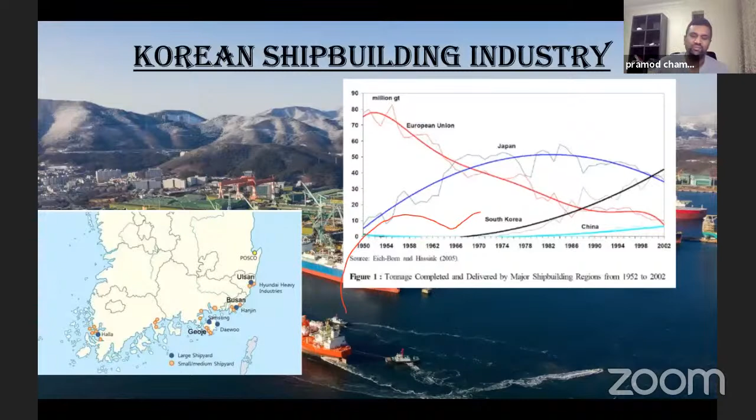Okay, now in Korea, there are 84 shipyards, 84 shipbuilding companies. And of course, the major five are the most important ones. HHI is Hyundai Heavy Industries, the same company that makes Hyundai cars. DSME is Daewoo Shipbuilding and Marine Engineering, the same company which makes our Daewoo Matiz cars. And SHI is Samsung Heavy Industries, the same company which makes the mobile phones. And Hyundai Mipo and Hyundai Samho are part of the Hyundai group. They actually spread around in many areas.

So if you look at the map, you can see Ulsan, where Hyundai Heavy Industries is. And then if you come to this area marked as Halla, this is where they have Mipo and Samho. This was basically Halla shipyard a long time ago, which they acquired, and now it has become Hyundai shipyards. And there are medium shipyards like STX, Daehan, Hanjin, Sungdong, Daesun, etc. And there are so many small shipyards. These small shipyards need not always make the full ship. They can also act as subcontractors for the major, medium and large shipyards.

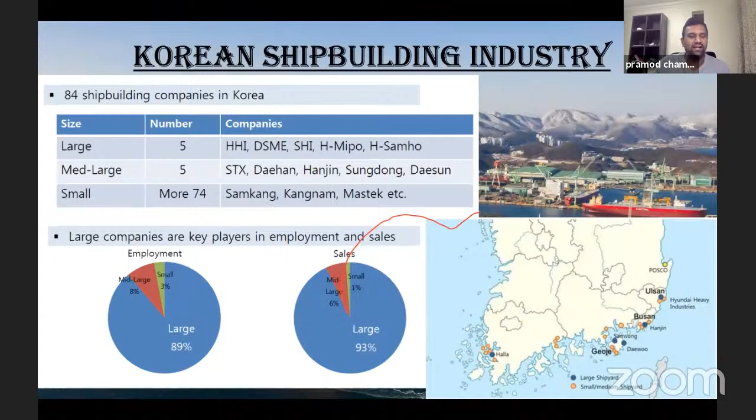So in Korea, one of the major employers is the shipbuilding industry. And if we look at other parts of the world, we always see blue collar and white collar, right? Blue collar are people working in the production area. White collar are people in design and office and things like that. Korea is a country where the blue collar people are paid more than the white collar people. That is also due to their high productivity and skill, which we'll come to later. But just as a fact, even if you're on a production site, you are getting more money than the guy sitting in the office or in design.

Okay, now I have a small time-lapse video. This is a Maersk Line container vessel. Just have a look, and we will talk a little bit about it.

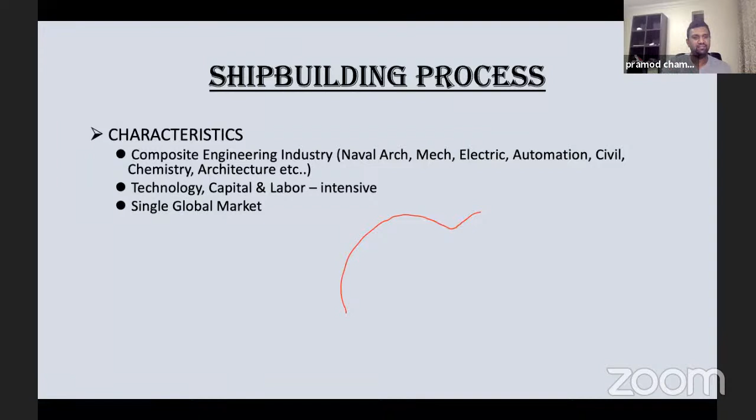And it's a single global market. What does that mean? That means it's not that there is a market for India, a market for Korea, a market for Japan. It does not work like that. It's a global market. Anybody can order a ship anywhere in the world. So you are competing with different countries. It's not a localized market. It's always a global market.

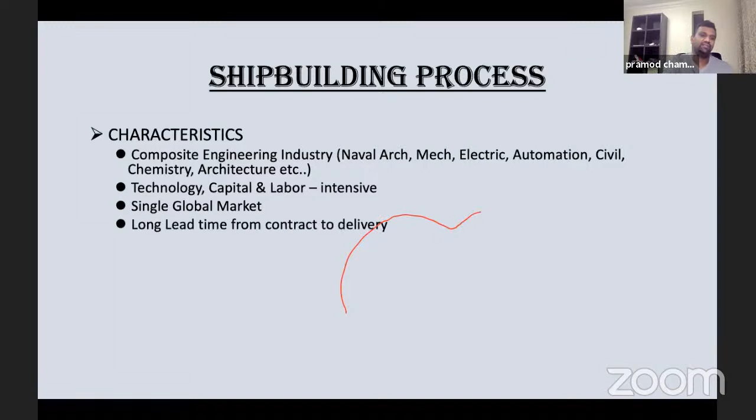And the other thing is the long lead time from contract to delivery. This is very important, because if you want to go and buy something from a shop, say a car, if it is not a new car with a long waiting line, you just go and get the car. You can drive the car back to your home. But in the case of the shipbuilding industry, it does not happen that way.

Why is it important? Because if I see the market now, okay, bulk carriers are booming, so let me go and buy a bulk carrier. Of course, you can buy a bulk carrier on the market as a second-hand vessel. But if you want a new building, there's a long lead time. So by the time the vessel is built, say 2 years, maybe the bulk carrier market has crashed, and the tanker market is up. So this is also a characteristic of this industry.

So the fundamentals you need to understand: capital is very, very expensive, and quality, delivery time, and reasonable price are very important. And it's made to order. Like I said, every vessel is different. Even if it's the same VLCC, unless it's a sister vessel, it's all different.

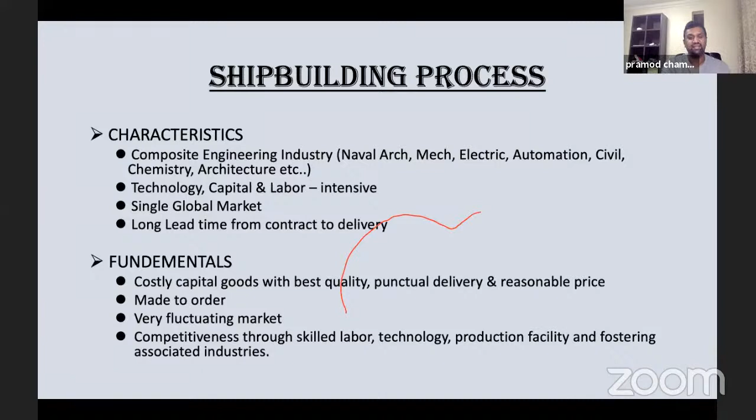And the market is very, very fluctuating. First, the Greeks will smell the market and start ordering, and then others will follow. Then the market gets overcrowded, and for that kind of vessel, the boom will go down. So it's a very fluctuating market, and competitiveness can be acquired through productivity, that is basically skilled labor. And most important is the last one, associated industries.

Many people ask me, why can't you build ships like this in India? You have very good weather compared to here. Here we have snow, very cold and very hot. Why can't you build in India, where the temperature is almost constant? The main problem is we don't have associated industries. We don't have other industries to support the shipyards. So we have to import everything from outside, which again increases the cost for us, and then we lose our competitiveness.

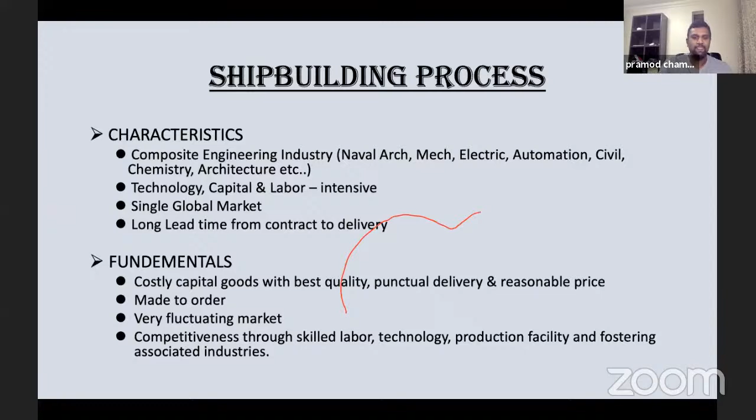Okay, now to understand the whole shipbuilding industry, we will have a look at the upstream and downstream. The upstream and downstream are used in a different way for offshore, so the offshore guys, please pardon me, I'm using your words here. So upstream of the shipbuilding industry could be shipping, energy, fisheries, tourism, defense. And downstream would be all the equipment plants, the paint manufacturer, the electrical equipment, steel, etc.

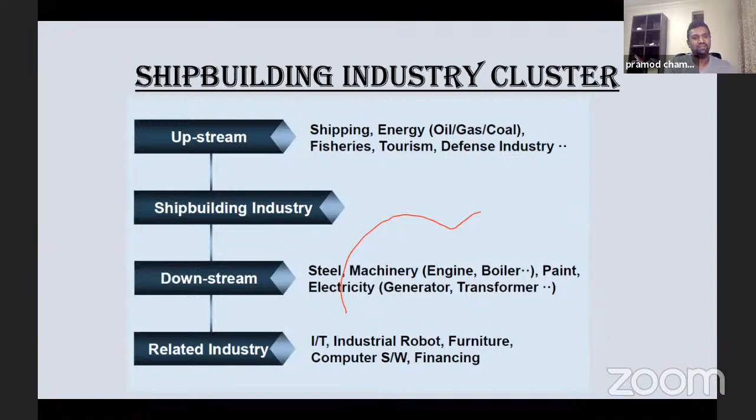And also very important are the related industries: IT, robotics, furniture, computer software, and very, very important is the financing. So this is where the shipbuilding industry is. The shipbuilding industry is very volatile. Any variation in either upstream or downstream can directly affect our industry. So it's like a stock which can be very volatile, like a Bitcoin maybe. The industry can be very, very volatile.

So how does shipbuilding happen from beginning to end? First, we build a contract. Of course, before the contract, there are so many other things which are not relevant here. Before you sign a contract with the shipyard, tenders have been made, and then you make LOIs with shipyards. Then you compare the prices of shipyards, and finally I select one shipyard. Then I make a contract. That is my first step.

After the contract, I have to start the design. Then what? Then it's the procurement. Once the design is finished, I have to order all the equipment required. I have to order all the steel. I have to order everything. Then once everything is in place, we have the production and then delivery. Very simple, right? So what do we do in the contract stage?

The contract stage actually defines R&R, role and responsibility for each party. It will tell you, this is my scope, this is your scope. And the common goal is what? To have a good ship and return on investment. And there is a conflict of interest here. The shipyard wants to build a not so bad ship with less cost. But the owner always wants high quality vessels. The builder wants a high price for the vessels, but the buyer wants higher quality with a lesser price. There is always a conflict of interest in the contract.

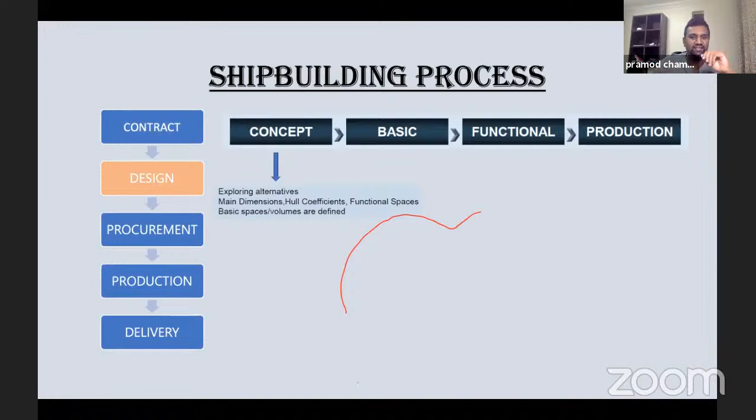In concept design, you are only fixing the main dimensions, hull coefficients, volumes, things like that. Then we move to the basic design. This is where we develop the system. Main propulsion plant, electric plant, everything is decided, and based on that we make the key plans.

We call the key plans lines, midship sections, general arrangement, system drawings, and deck house arrangement. This is prepared. I'm not fully sure, but by the time you pass out from the department, you will be doing concept plus a bit of basic, not 100% of basic, but maybe 80% of basic design as well. But other things you won't be doing during your career; you will get to see them only when you're working with the shipyard.

So once this is developed, then we go to the functional drawing. That is where the systems are finalized. Equipment selection is done here. So while moving from concept design to the functional design, you have time to finalize your maker list. By the time the functional design is finished, your maker list also will be frozen. You cannot change anything more.

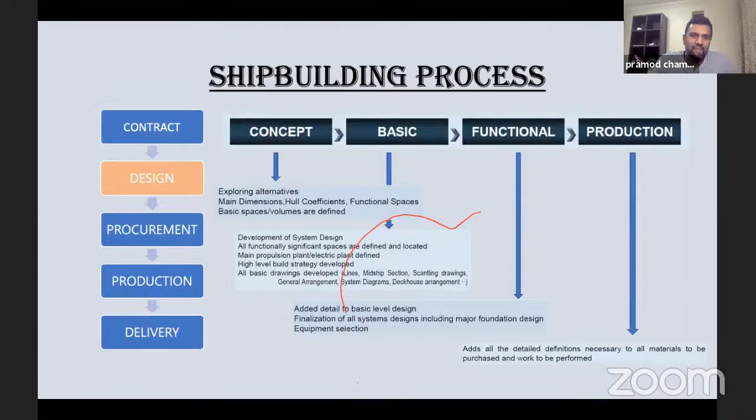So then we finish the design phase. After signing the contract, in general, it will take a year to finish from concept drawing to the production drawings. Now I have put procurement and production together. Why? Because once design is finished, the designer's work is not finished. He has to issue the purchase order specification. Normally, it goes to procurement.

The procurement team uses this POS and then sends it to various makers. Makers will come back: okay, we can do this, we cannot do this, this is the price, and so on. This process also takes a while. It goes up and down, and then the client says, no, this maker is not good. Sometimes clients also have under-the-table dealings with the maker. So this is also where the shipyard can make money. I will give you an example.

You have different paint makers, for example. You have IPK, Jotun, KCC. The shipyard always tries to get the cheapest, satisfying the purchase order specification. Say KCC is the cheapest, but the owner wants IPK. The shipyard is entitled to pass this extra cost to the owner, because the shipyard has the right to choose any maker from the maker list. Suppose I am the shipyard and I have chosen the cheapest one. If the owner wants the higher one, they have to pay the extra.

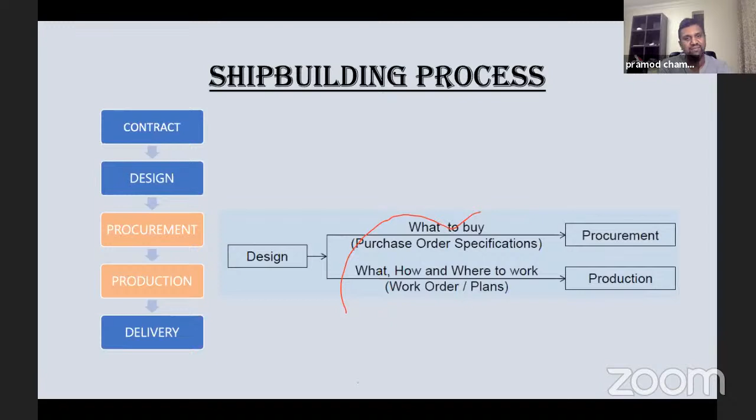They are very good at new building, if the process is from the beginning. But if there is a mistake and you want to repair, they are most of the time at sea, because they are not used to this kind of rework. So in any project, as a project manager, your effort will be to minimize the mistakes in design, because small mistakes in design actually cost a lot for the shipyard.

We'll talk a little bit more about procurement. As I said, it's the selection of equipment or material based on the maker list. You cannot always go for the cheapest. There is always a risk, right? Suppose you go for a Chinese maker, and then you find that there's a long waiting time between when the equipment comes on board and when the vessel is delivered. Most of the warranty starts when the equipment is delivered on board, so then it's the shipyard's responsibility. So if you always go for only the cheapest without considering quality, sometimes it will backfire. So there's always a risk in buying the cheapest one.

Another important technology is just-in-time delivery. What is just-in-time delivery? Okay, I am having keel laying today, and maybe my engine room block will go up next week. So you deliver your main engine only next week. Don't give me it one month before. That is just-in-time delivery. That actually saves a lot of cost for the shipyard and also a lot of space, because you are not storing it. It comes just in time, and then it is lifted by the crane and put on the ship directly. This is also very important.

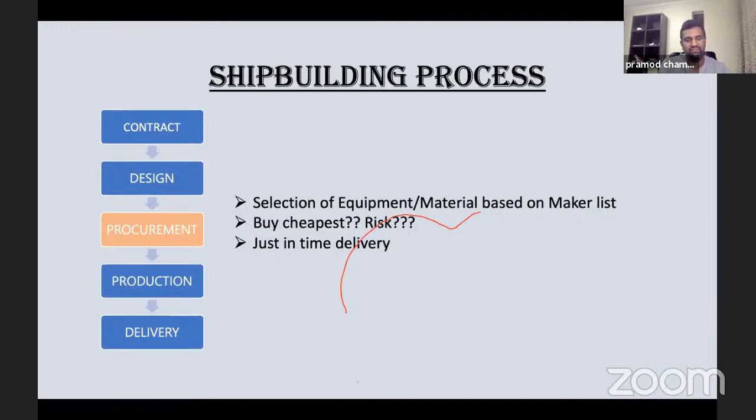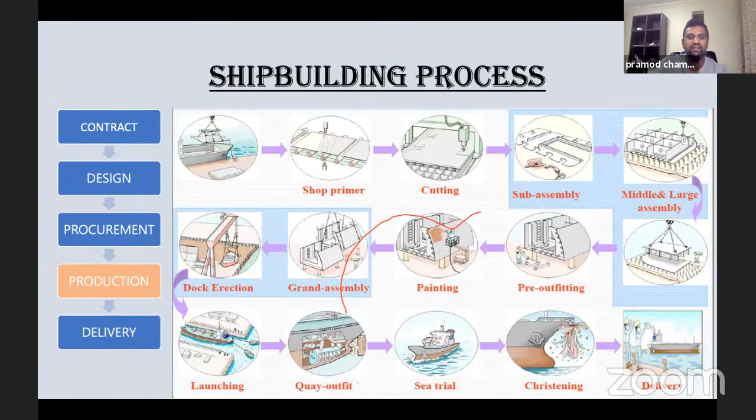And then after the sea trial is successfully completed, we do christening, or we call naming ceremony, and then we deliver the vessel. So this is the total shipbuilding production flow chart. Now you will be wondering how much time it will take. So this is a typical building schedule in Korea. Of course, they're trying to reduce it much more now. So you can add, say, 1 year of design work, and you'll get the total time required from contract to delivery.

So KL is the keel laying, SC is the steel cutting. And from keel laying to launching is the period where you have your vessel inside the dock. Why do LNG ships take a long time? Because if you see, from launching to delivery there's about 8 months. That is because they are doing the cargo containment system, which is Mark III or NO96 in Daewoo for the LNG carriers. And for containers, it's slightly longer than VLCC and Suezmax,

because in container ships you also have additional testing like the container loading test. You have to take one container and try to put it inside and see if it is correctly going in. The container loading test will take an additional 1 month. Otherwise, tanker, bulker, everything, after launching 2 months, the vessel is ready for delivery.

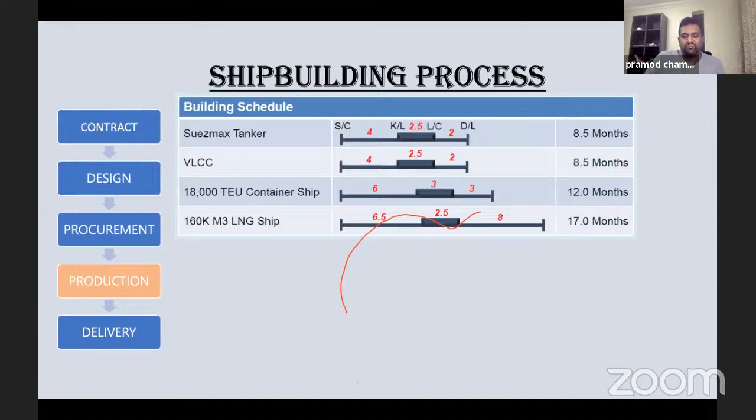So now I want to touch an important part here. This is some indication of how productivity translates directly into cost. If you do some work in the shop, the same work, if you do it at the quayside, it will cost you twice. That's what it says, 2.0 and 1.0. That means as much work as you can do in the pre-stages will save you that much money. That is where pre-outfitting is important, because the same piping work, if you do it at quayside, is going to cost you twice.

Why? Because the workability is different. And plus, when you're launched, all the scaffoldings are out. So if you want to do repair work, you have to use rope men, those people who use the rope and go around and do the work, or you have to install the scaffoldings again, which will cause more paint damage and things like that. So it is always ideal, before you go to the dock, to finish as much as possible. And if not, before launching, try to do as much work as possible.

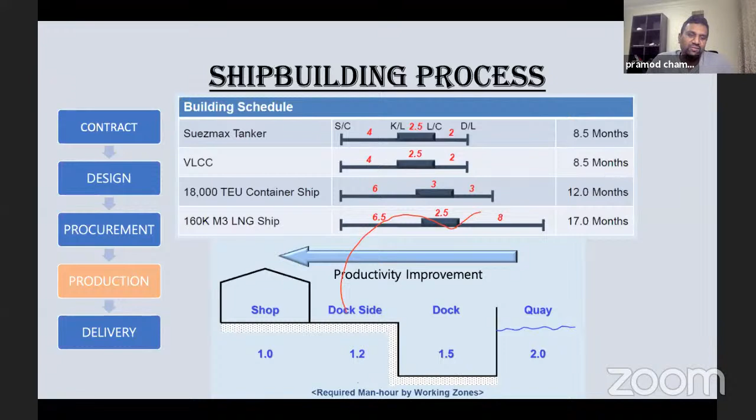Now I go to the final part, that is the delivery of the ship. For delivery of the ship, there are what we call final deliverables: the product, the ship itself, of course. Then we have to give the as-built drawings, the sea trial data and results, and the preliminary trim and stability booklet. And then there will be spare parts, all the certificates, and the equipment and system manuals. So that is how you go from contract to the delivery of the ship.

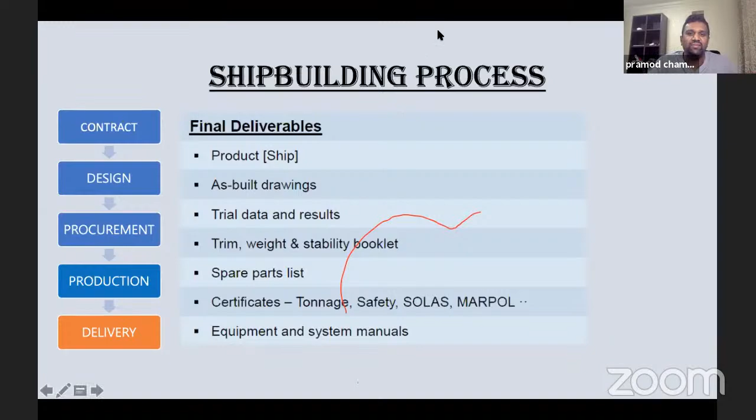So here I conclude my presentation. Hope I was clear to all of you. Thank you.